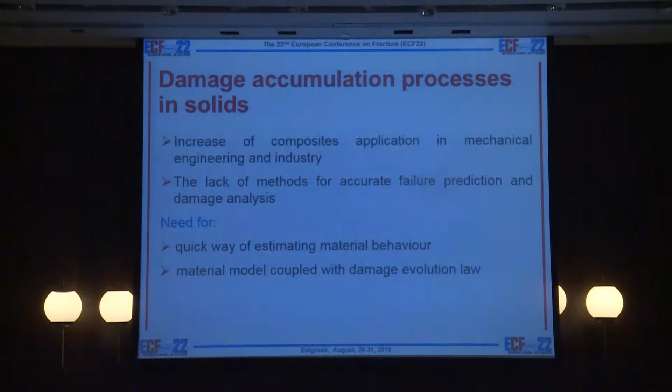Kachanov and Rabotnov in their pioneer works proposed continuity and damage parameters for the mathematical description of damage evolution processes. Since that time, damage accumulation equations have been developed, and nowadays many works describe mutual influence of stress-strain state of structure and damage accumulation process near stress concentrators.

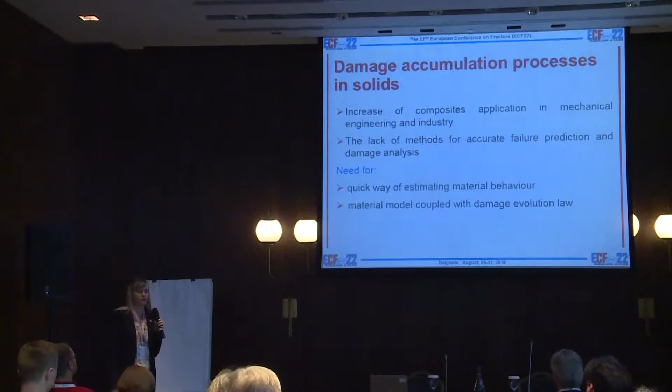We can divide the whole continuum damage mechanics into three directions, three big groups. The first group is damage evolution equations, taking into account some states of damage accumulation. Another group is material models for anisotropic damaged materials, and the third group is asymptotic solutions for coupled elastic damage, plastic damage, and creep damage problems.

To elucidate the effect of damage accumulation in real conditions and in real structures, we have to apply finite element method to the cracked specimen under mixed loading.

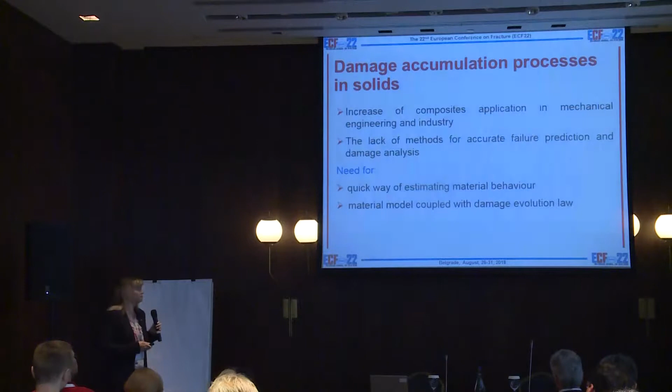In our work, we used damaged material model based on continuum damage mechanics. This model was first proposed by Dubé and Doquet and others in their works. The advantage of this model is that it is rather simple, it is reliable, it is verified, and nowadays it is widely used.

The initial material, undamaged material, is considered to be isotropic and elastic. The stiffness degradation caused by accumulation processes is simulated by adding a damage tensor into the material constitutive equations, which was proposed firstly by Sun and Khaleel in 2004.

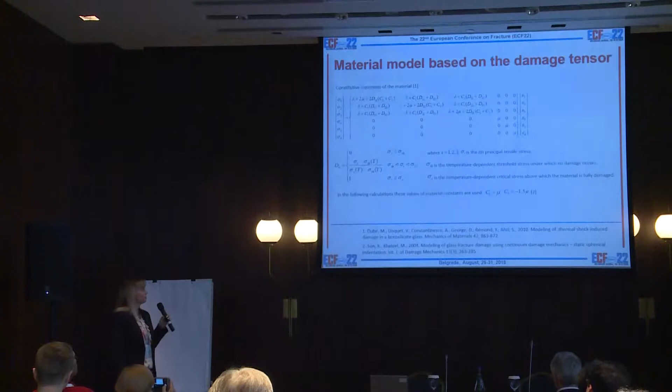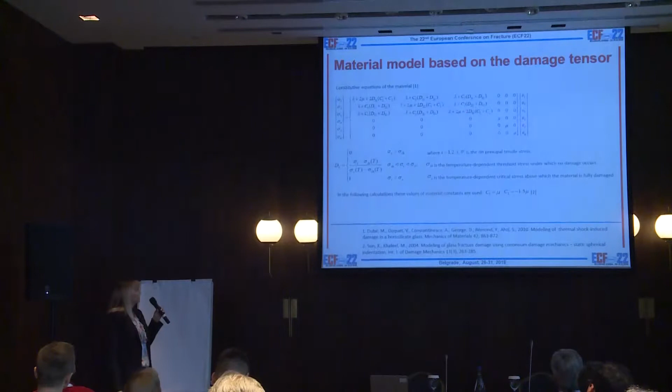Damage tensor components are functions of stress state, and damage parameters follow the linear evolution law. Here it is: sigma threshold is the temperature-dependent threshold stress, and sigma critical is the temperature-dependent critical stress. The whole constitutive equations of the material you can see in the slide.

In order to carry out our calculations, we use Simulia Abaqus. Abaqus provides a wide spectrum of user subroutines, which allow us to adapt the standard program for particular needs of our problem.

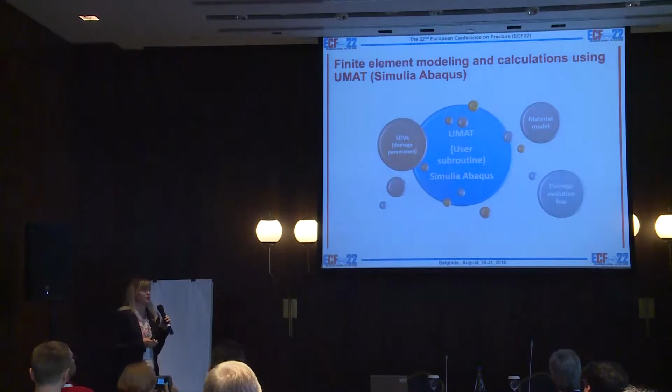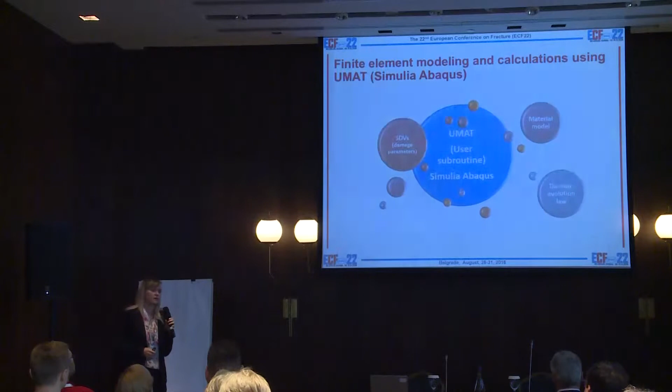To define any complex material which cannot be found among standard Abaqus materials, we use a user subroutine, which is called UMAT, user material. It is a flexible and rather powerful tool for analysis.

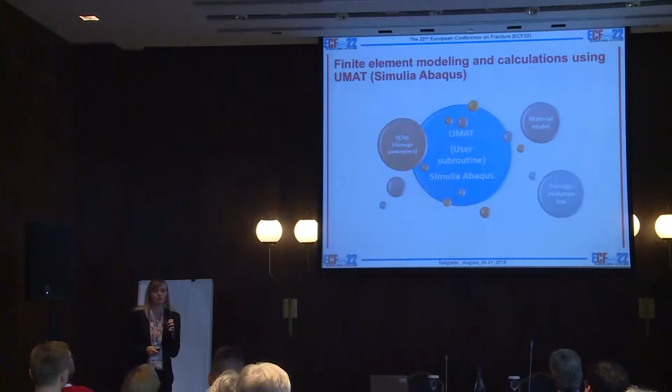The SDV, solution-dependent variable, is a value which is calculated during the analysis and used after that in the results. In our particular work, the example of SDV is the damage parameter.

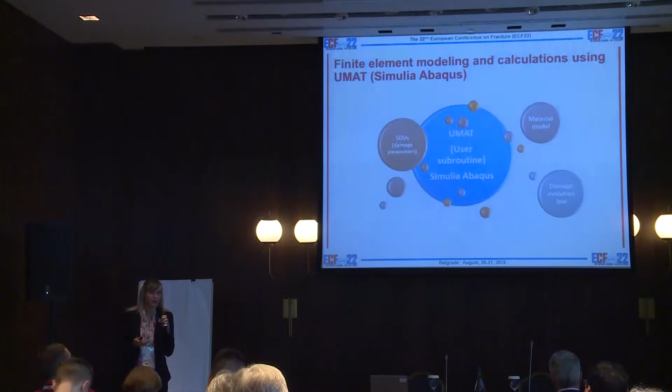And with the user subroutine, we applied it to different specimens. First of all, we took the simplest structure we could think of: a 3D elastic rod, rigidly fixed at one end, subjected to uniaxial load in direction 1.

We didn't add some difficulties in the model because we wanted to compare the results of the standard material and the UMAT material.

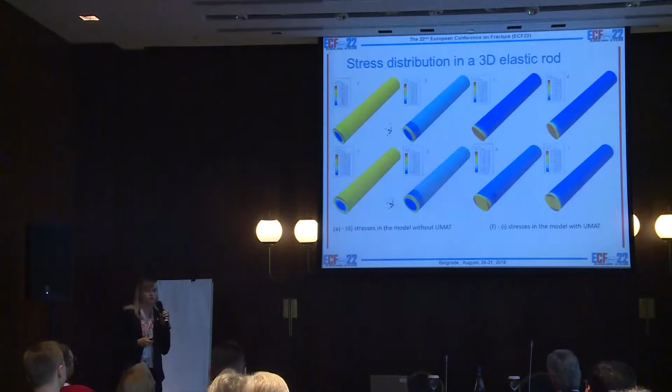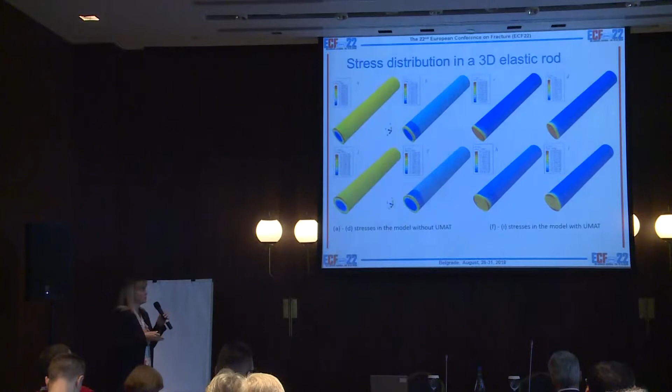It is seen from the finite element analysis results that damage accumulation affects the stress-strain state of the model, because values of equivalent stress and stress tensor components without UMAT are considerably lower than with UMAT. Then there is the damage distribution.

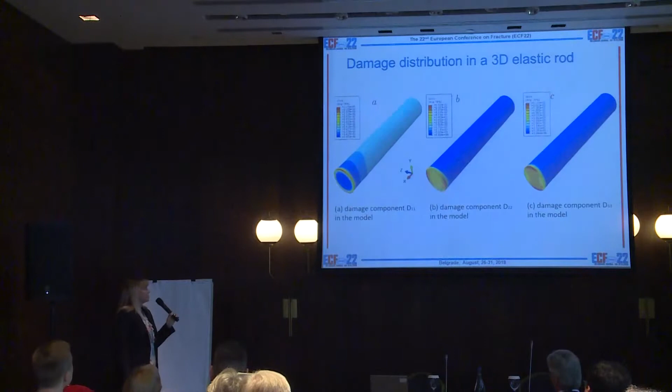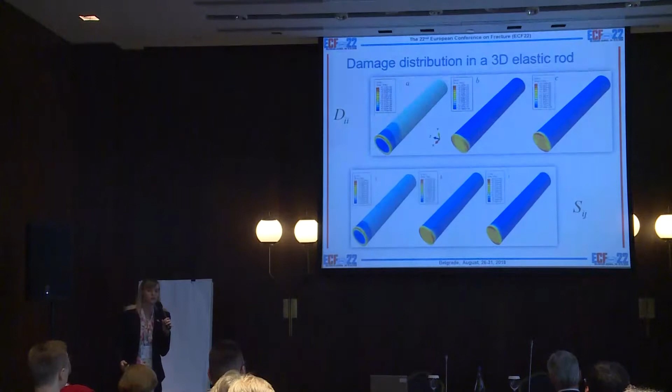Damage distribution of each component was also found, as you can see on the slide. What is interesting is that they are characteristically similar to the distribution of the main stresses in the model.

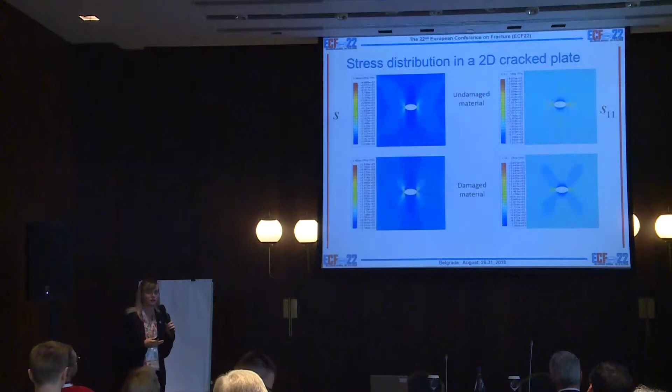The second structure was also simple: a 2D elastic plate with a central crack. Here we can see the opposite feature, because stresses in the model with UMAT are considerably lower than stresses in the model without UMAT. These are the S11 components.

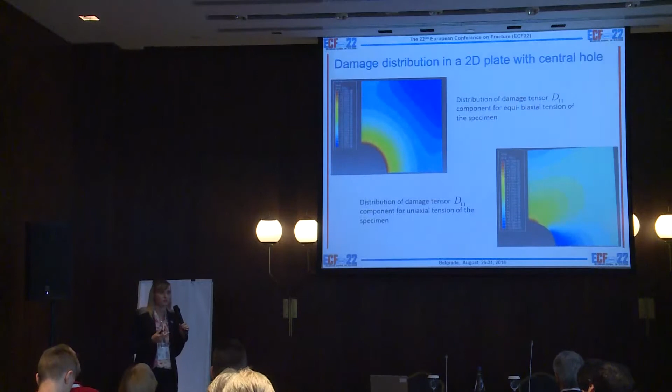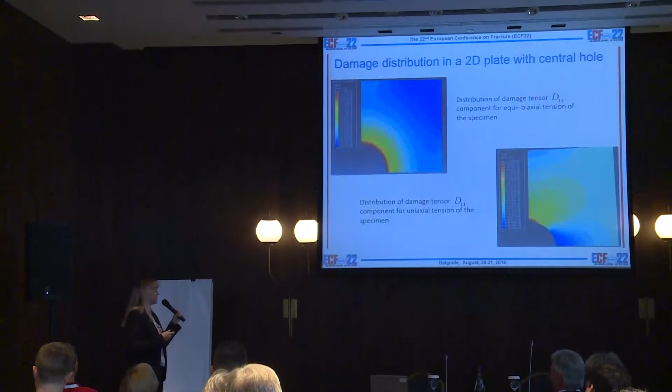So, in conclusion, some numerical simulations were obtained by the finite element method combined with user material.

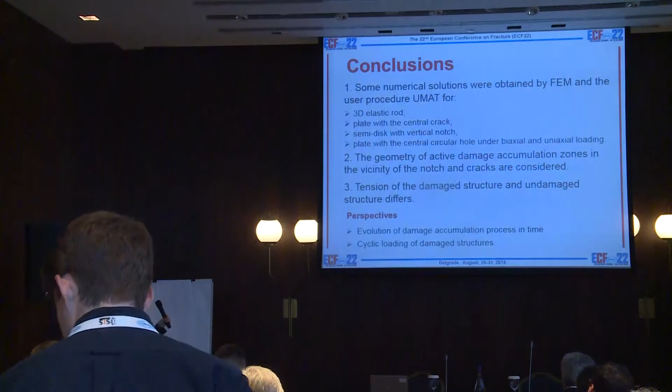The geometry of the active damage zones in the vicinity of different stress concentrators was studied. As stress concentrators, we examined a notch, a crack, and a hole. We see that tension of damaged structures and undamaged structures differs.

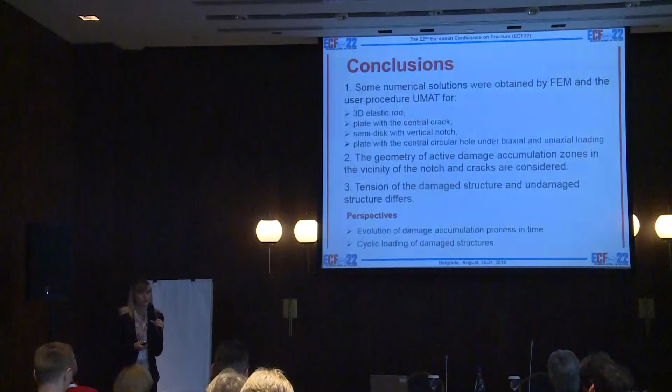In perspective, we are going to study evolution of the damage accumulation process in time, and we have an idea of studying cyclic loading of damaged structures.